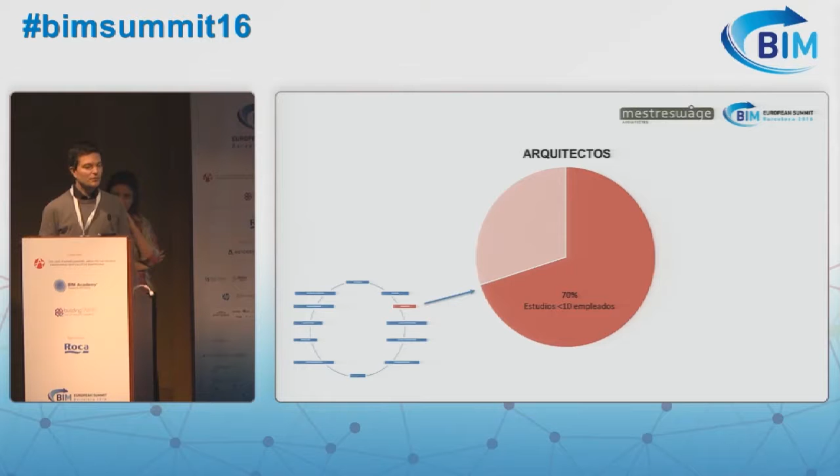Another important aspect here is that 70% of the practices in our profession have only 10 people working on them, or even fewer. So we represent a large part of our sector.

In our practice, we work architecture and urban planning as common disciplines, and we offer different services that go from conceptual design to works management. We have implemented BIM from the first stage up to the last one.

Our values, you can see them here on screen. I think the last one is the most important one. Within this context, we believe in an open architecture that is inclusive, geared towards the user, that can be adapted, and we do the projects thinking of the building life cycle.

When we say open and inclusive, it means something elastic, but we also think we need tools that can offer transparency in some way. We are small, but with an international focus. We collaborate a lot with different architecture studios in Norway, and the same happens in Finland.

BIM in Norway is very different from BIM in Spain. We are more similar to BIM in Finland, for example. So in the first phase, when we want to obtain projects, we do a project. And I will talk about the advantages. Of course, there are some disadvantages as well, but I will talk about the advantages of using BIM.

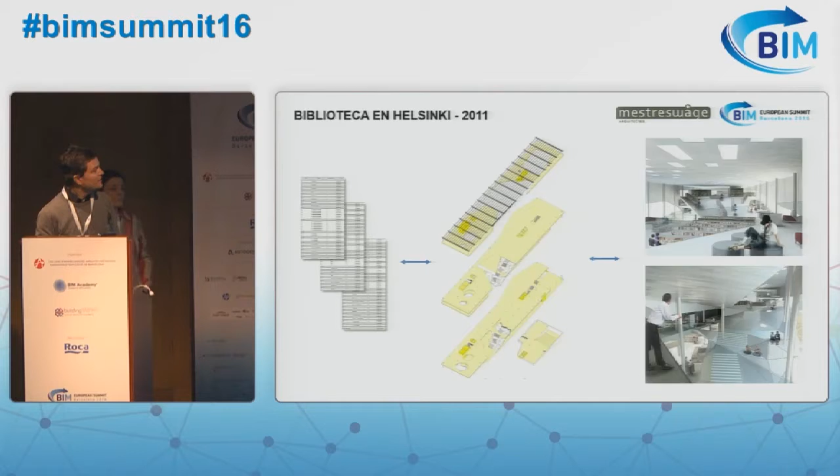We have another example here. That's a proposal for a library in Helsinki. We have a proposal for another project here. We have also post-production for images later on, of course. But basically, these are different proposals we've made.

Maria will talk now about two projects that we are working on right now. Actually, the first one is finished, for the Rådhus, which is from a competition we won in 2010. And then the second one is an extension of a hospital.

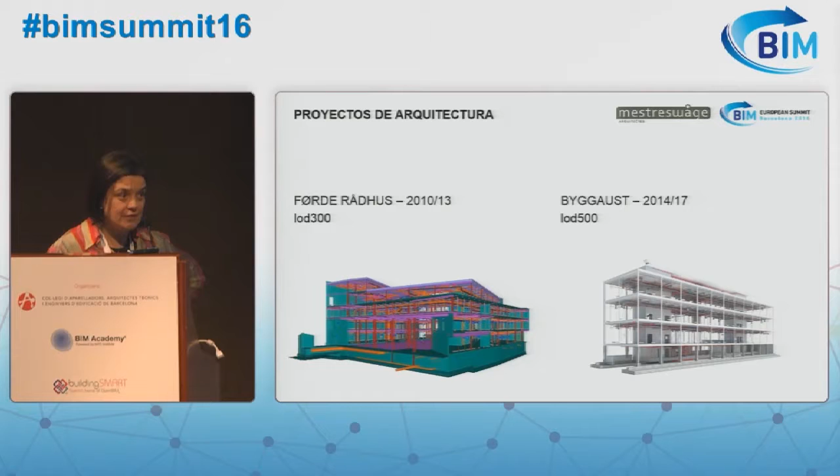For the first project, basically, we worked for local administration, and they had never heard about BIM. So the team of architects suggested to use BIM for coordination. The second case on the right is very different. It's a hospital that belongs to a wider national organization, and that was a demand from the client. We had to use BIM. In the first case, we stayed in the volumetric coordination and management, and in the right one, we are going to try to achieve LOD 500.

In the first case, we were only involved in -- so basically only the technical profiles were involved in the BIM project. Now, on the right, we have also the property, and we expect that the construction company that won the competition will also use BIM.

As Magnus said, in Norway, there's another structure, and each discipline has its own contract with the client. So it's good that each discipline has their model, because, you know, the legal responsibilities are well defined.

And basically, we work with three main coordinated models, and we see that each planner worked with the central model. That allowed us to have delocalized groups, for example, some in Barcelona, some in Norway, in a very remote place in Norway. That allowed us to work together. And that was good, because we could control everything on a daily basis without having to be physically at the same place.

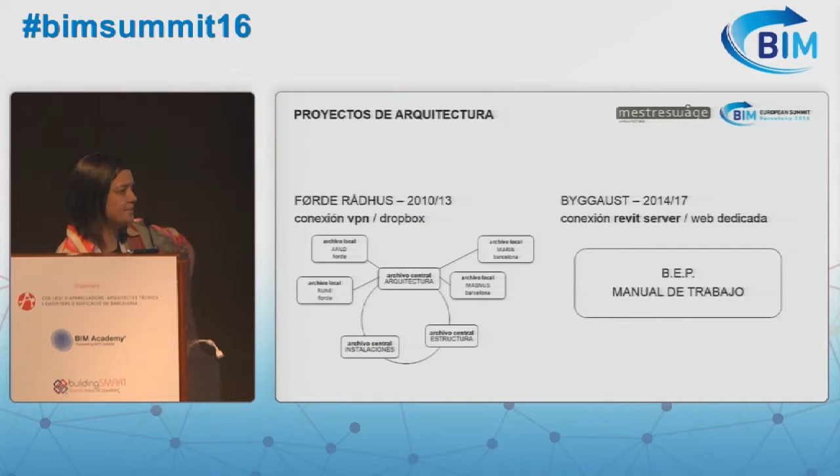With the BEP, we see that it's important to define why we want to use BIM and what requirements we have, what BIM strategy we are going to follow, if there are public requirements like in England, and we need also to define what standards we are going to use.

We use the standard from the contractor sector in Norway. Also, there are definitions. We assign roles, and we assign also the requirements.

We have very evident things here. For example, the origin of the project, what levels. We also deal with naming of the objects, alphanumeric. We don't use the OmniClass classification, we use a Norwegian classification, and this is one of the pillars to work properly all together.

We also need good communication, and that means that every project has a transparent web for all the members of the team. The calendar is clear, everyone has access to that. All the decisions regarding design are also available for everyone. So every agent participating in design can read these things. All the work in progress documents are also available.

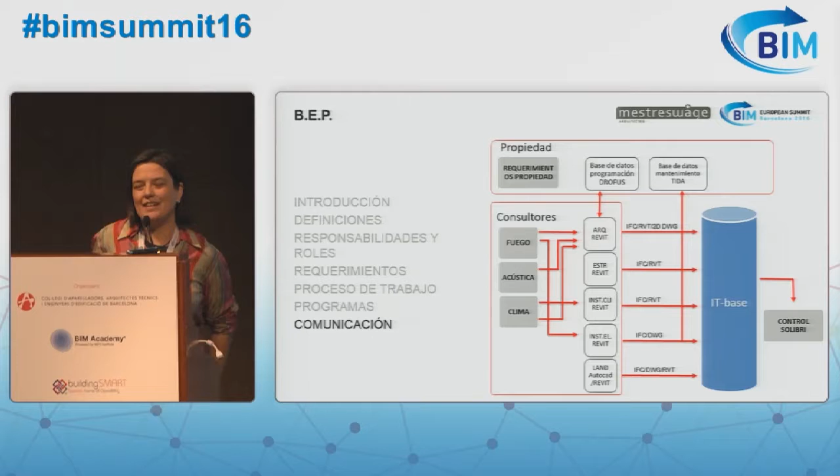The file structure is also important, because we live in an imperfect world, and the perfect BIM does not exist either. We have a lot of information coming from reports or from CAD, and the input and output need to have a structure that allows every kind of information to be part of it.

In white you can see the files, and we got as many IFCs as native formats, and we got to 2D CADs, because, for example, one of the members could not use another thing.

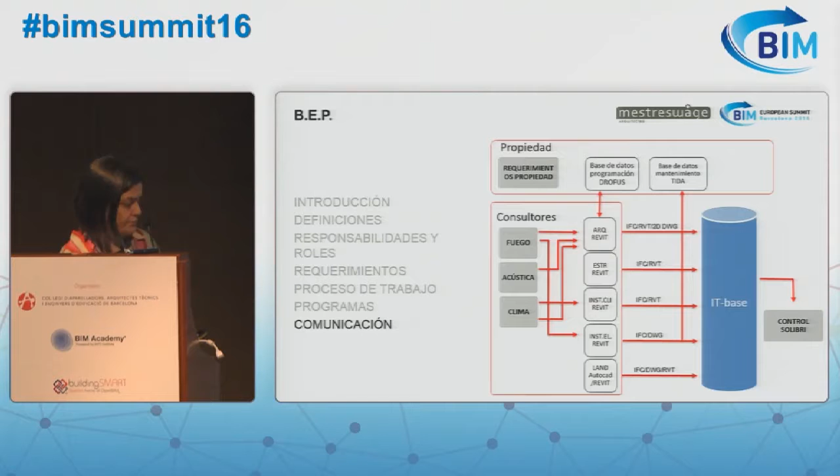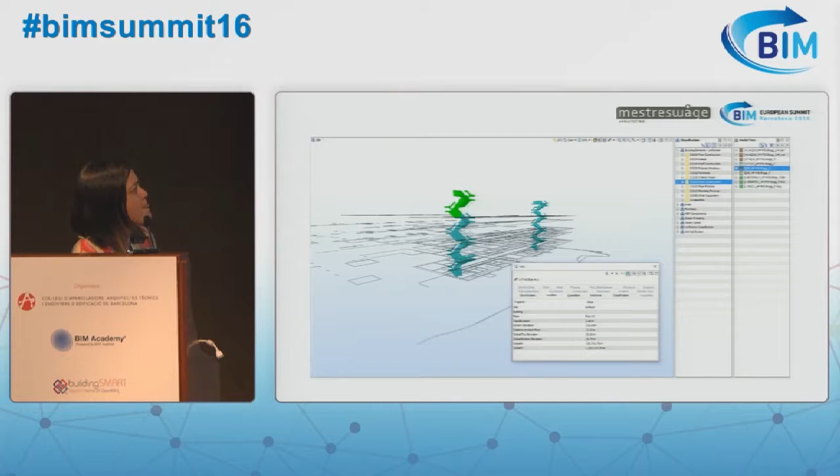Here we have a view from Solibri, the program that we use in our working meetings. You can see the facilities here, also some construction elements. And here we have some confrontation between architecture and facilities.

This is another program we use. This is a program used by people who do not really know about CAD. It's dRofus.

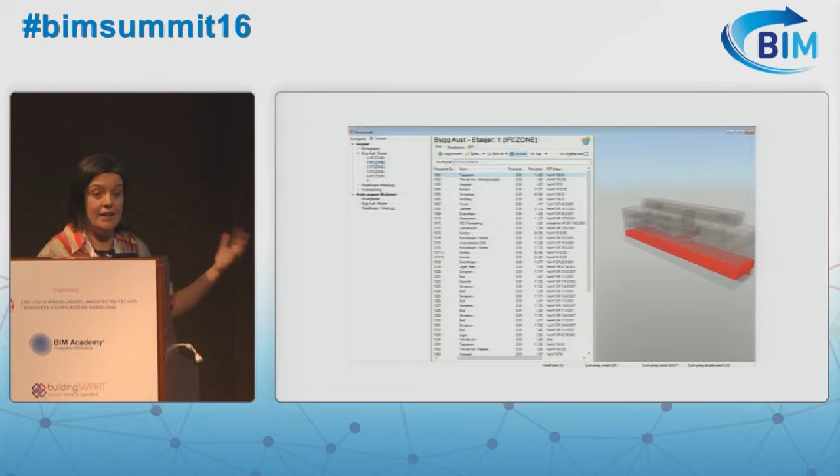For example, in the hospital we have standard rooms. They are the same throughout all the country, so we can reuse the information from previous projects and use it in our building. We can do some modifications, and we can create different rooms if we want to. This is important because people that do not know about modeling can do it.

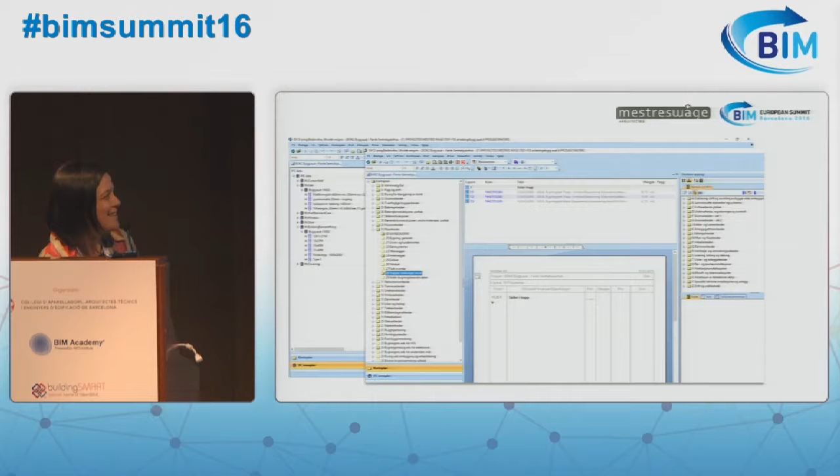We have also used this to do some measurements, but we've had some problems, unluckily.

Skanska won the competition. They are the ones that are going to build the hospital, and we hope they will do what they said they would do.

They will, because it's way better, yeah. We are saving paper here, right? They won't be working with obsolete documents if they use the IFC.

And we know that the people working on the works will have the model, and they can work in 3D to understand better what they are doing.

So, just as a thought here, we're always thinking what we are obtaining by using BIM. And I think that up until now, we've seen that we spent pretty much the same time in our office working on the project.

But what we've been able to do is take some time that we devoted to production, to idea production. So we can do more research, we can come up with better ideas, and please don't reveal these because otherwise our salaries will go down.

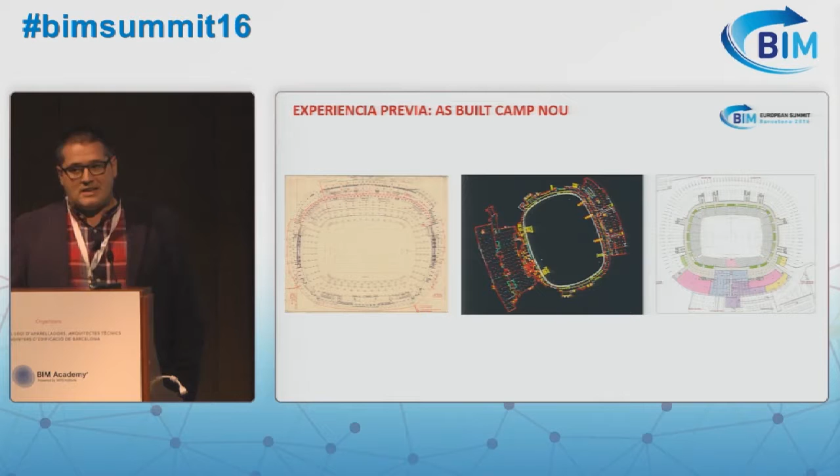So we weren't able to match the data that we had, and we really had to see the geometry, which we didn't have. Therefore, we decided to make a topographic study in 3D of the whole stadium with more than 5,000 scanner points, and with that we developed the model you can see on the screen.

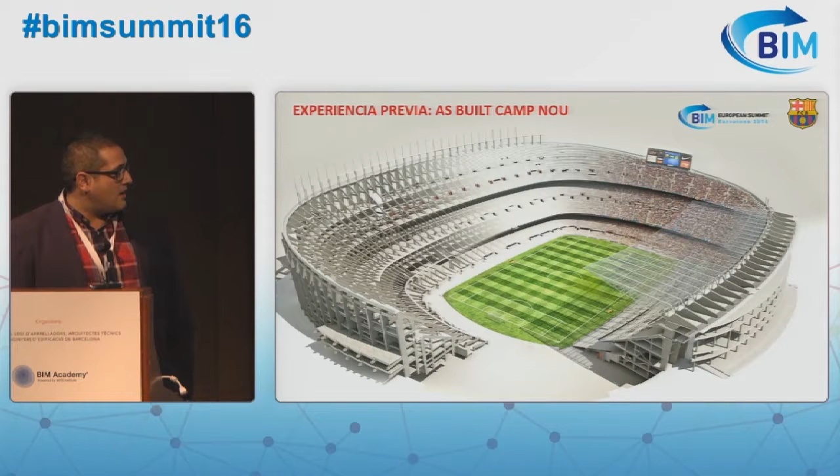Besides that, we also incorporated a range of parameters. Here you can see some pictures of the model, and then we've got a video which we created about eight months ago.

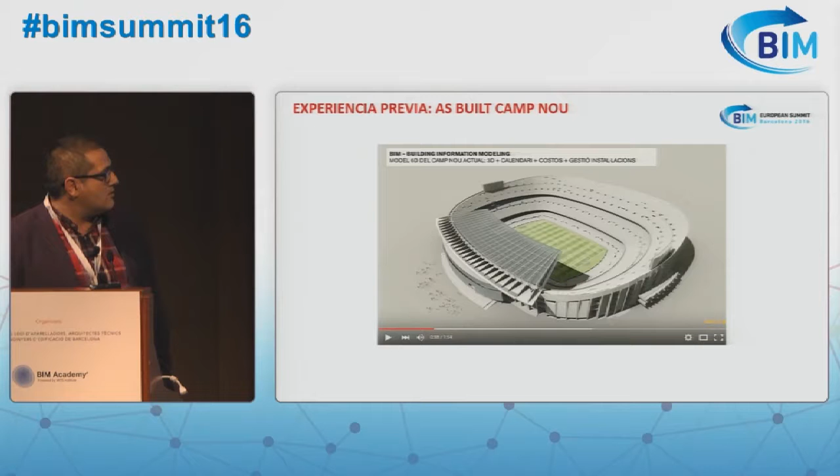Here it is explained the process, the developing process of this model and how this information is integrated.

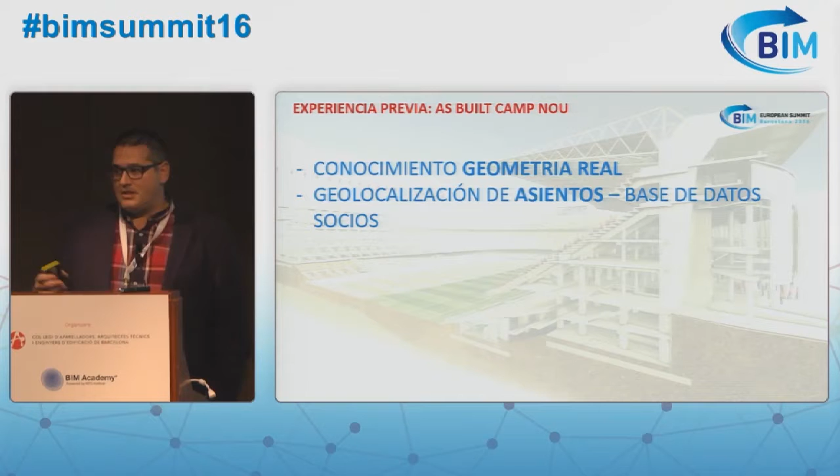We had to gather knowledge on the real geometry. On the other hand, we developed a side project where we designed all the seats of the stadium. We did geolocalizations of them, and we matched it against the database of members of the club, so you can see how powerful this is on a social level.

We incorporated all the structural data—we had a consultant for that. We also incorporated all the visible facilities, and we are incorporating both the visible and underground facilities in the whole stadium, in order to avoid some of the problems that I'm going to explain right away.

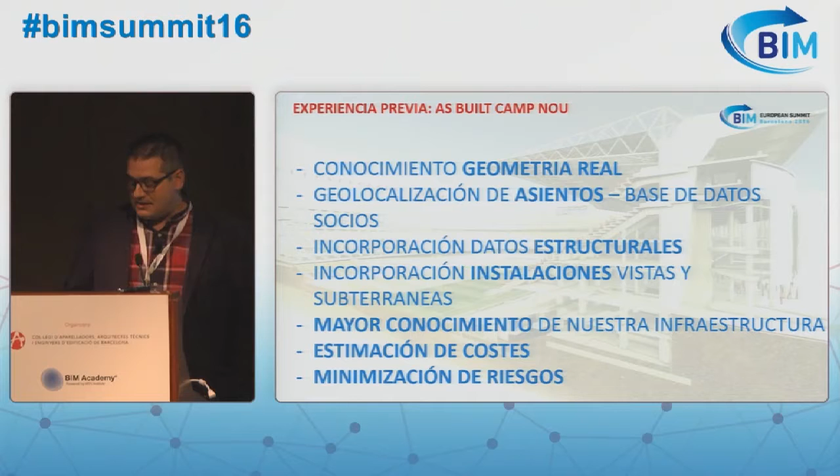This allows us to have a deeper knowledge of our own infrastructure, and it's easier to minimize the risk. On the other hand, this model has allowed us to estimate the costs in a much more precise way.

The second point we saw very clearly within the team at Espai Barça was that this whole BIM thing is kind of difficult to grasp if you don't have any idea about it. It's difficult to understand if it's a technology, how to implement it into a project. We realized it was a huge opportunity for the football club.

In terms of commercial exploitation, from then on we decided, as something mandatory, that any stakeholder participating in the process should have minimum knowledge on BIM. They should be able to demonstrate some minimum skills in BIM technology, but it's pretty obvious that any company, any constructor that wants to work with us, must be at ease with BIM.

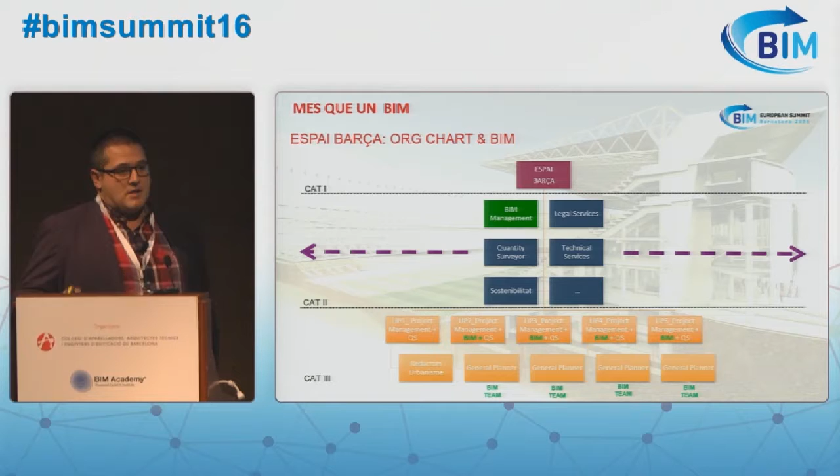In this slide, I would like to present a summary of our organization. As you can see, in all project units, both the architecture and engineering groups, we are demanding BIM knowledge. Also, for the project managers, we are demanding to integrate BIM management. And also at a consultant level, towards the client, we have a BIM management team in order to make this traceability possible.

There's a quite clear phase within the project, which is the design and construction phase, and then there's a second stage, which has been developed in the past six months, which is management and exploitation of assets.

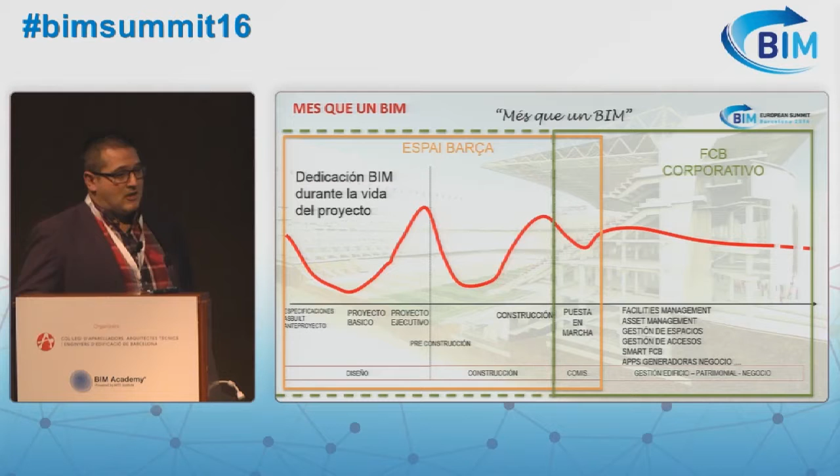This is now under the management of the club, the football club. So we are facing a project which does not only include building, but also has corporate components, and therefore the motto: more than BIM.

So this philosophy can be summarized as BIM becoming a methodology for the football club. We also approach the database in a global way, but at the same time we focus on the goals that we want to reach with the BIM methodology.

For the football club, both in the construction and the exploitation stage, it's an as-built, a continuous as-built, and this will allow us to manage the whole facility in a more coordinated and controlled way, which is not possible right now. All this has some internal implications.

In our strategic plan, there's this term, BIM culture. When we talk about BIM culture, there's a direct implication to different departments within the club. Some of them really need to work on that, and some others will have to integrate at a cross-sectional level.

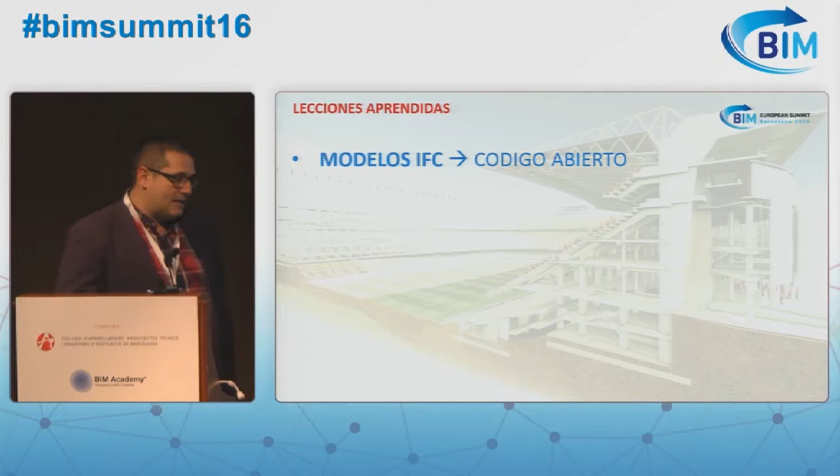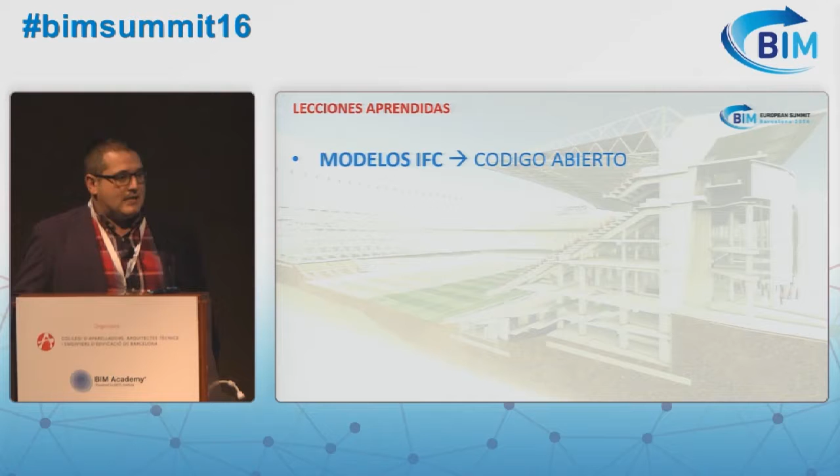At that time we decided we went for the open format, and I think we made the right choice. Nowadays, I think it was the right thing to do because it allows us to scale the project.

Secondly, it seems very easy, and I'm quite glad to be here today and see that so many people are developing projects like that in other countries. But when you are facing BIM implementation for the first time and you try to grasp it, which is something quite complex, and you try to define all the tenders, all the processes, the BIM execution plan, the taxonomy, fundamentals in taxonomy, the parameters that should be used in the models, the degree of detail that you are going to use, it's not easy.

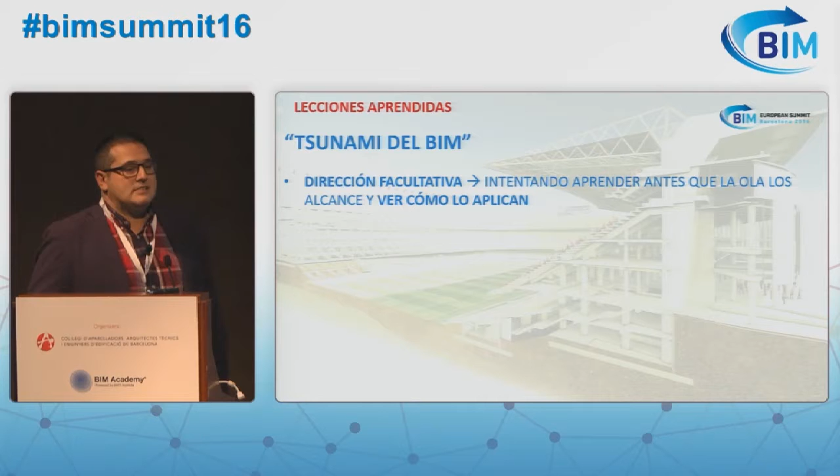Project managers should try to learn before the wave reaches them. So I have this feeling that they are really striving to see how they are going to apply it, how they are going to implement it.

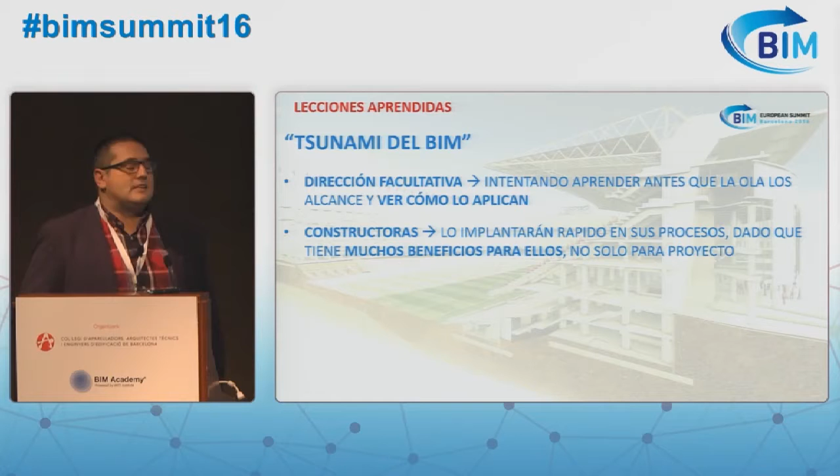Construction companies, from my experience having met many of them, and some of the most important of them, many are already implementing BIM, even if the clients are not requesting it, because they really see the advantages, not only for the project, but for their own project management.

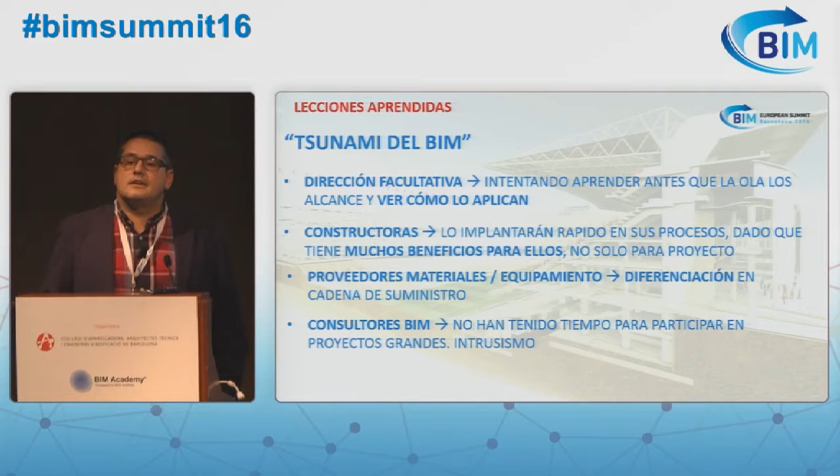Also, materials and equipment suppliers, I think they should be differentiated in the supply chain. And finally, all the consultants, BIM consultants, my feeling is that not everyone has had the chance to participate in large projects. It's not the same developing housing units as a football stadium. So it's a continuous learning process. Also, in my opinion, we have seen some intrusism, people from other fields taking advantage of the situation and providing services which are not their expertise.

Finally, four key concepts which we believe are key for success. I always highlight common sense. I really defend BIM, I believe it's great, but we should have common sense. Until a few days ago, we were working without BIM, and sometimes we try to develop everything based on BIM, and this makes it more difficult to have a clear traceability.

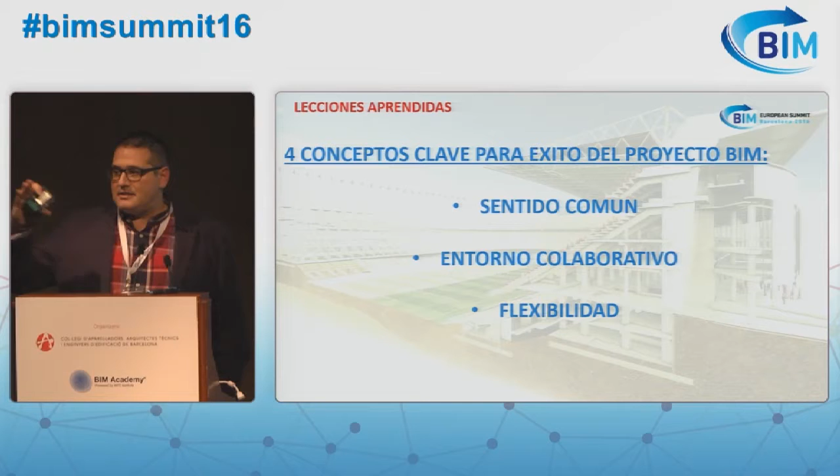Very important: a collaborative environment when developing a BIM project. This doesn't only mean having the best BIM consultant at your side, but this person must be willing to collaborate with the customer, with the engineers, and everyone. Flexibility to make decisions, to focus clearly on the different goals without getting lost, without being too ambitious, as somebody was saying before.

And finally, that all stakeholders see it today as a great chance to improve their professional careers. I believe that's a huge improvement for the industry. Thank you very much.

Tornadoes of BIM, we've had tsunamis of BIM. Now, I'm all for disruption, but they seem a bit destructive for me. I think I prefer a force that tends to do well for honest and hard-working people, and perhaps the opposite for dishonest and lazy people. So I'll offer up magicians of BIM.

Anyway, we go from someone who I would guess has had one of the shortest journeys to get here today to someone who's had one of the longest, not the longest, but our third and final speaker is Felipe Quiroz, who is the founder and current technical director of ID and BIM from Peru. Felipe.

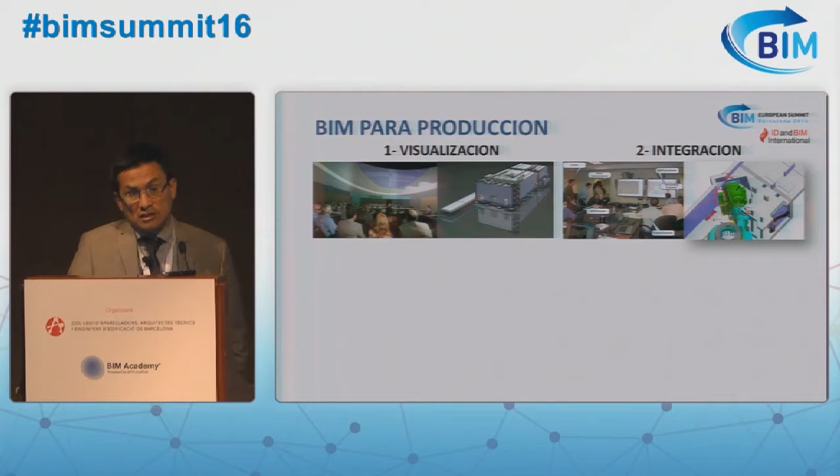But I will talk about the experience in Latin America, Chile, Argentina, Peru, and also past experiences in Europe, to bring BIM to another level, not only in visualization, integration, and harmonization. In Peru right now, we basically use it for harmonization, but we want to bring it to the next level, to the production level. And that requires technology in order to model something, and we can do all the draftings, all the planning, and everything, and we can create automatic machines. But before, I need to explain some things.

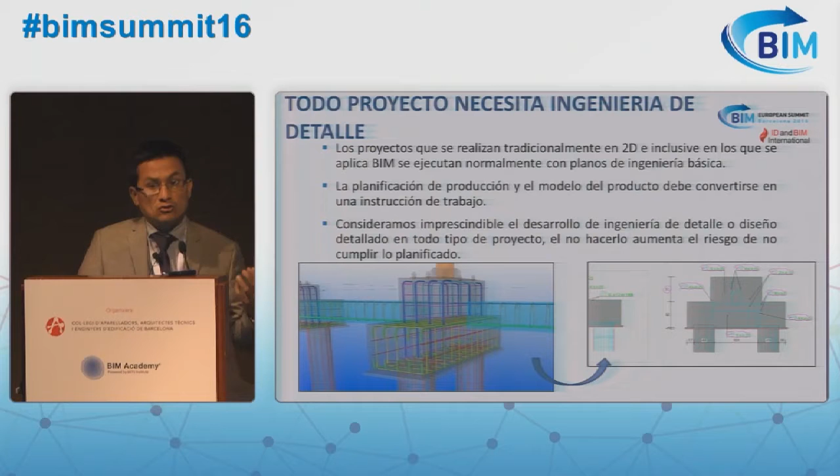In Peru, really, we don't have the obligation to do detail engineering. I think it's the same in Spain. We build using a basic engineering drawing. That will have to change if we want to bring BIM to the scenario. We want to create every project with a graphic representation obtained from a model, and that's detail engineering.

When we talk about virtual design construction, we see that in Peru we use VDC to generate BIM models. But not only that, we want to move the project to the early stages so that we can have a positive impact on costs and we can do some economic assessments.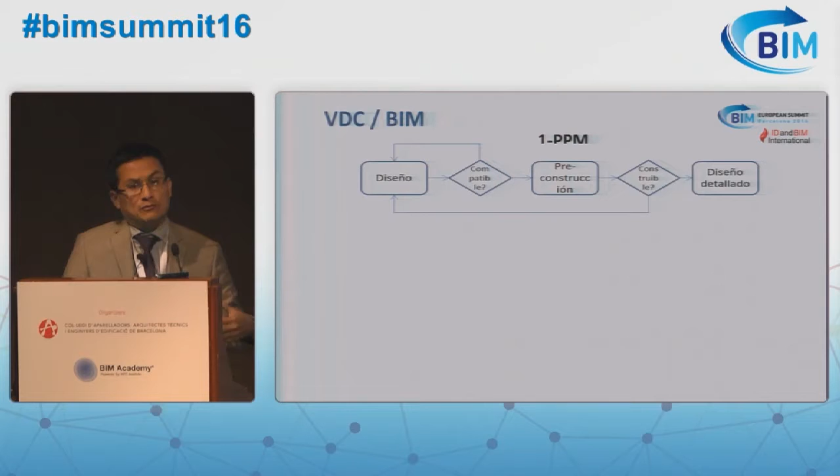How do we do this? Well, our company helps a designer, a construction company, an engineering company. We look at what processes they follow, a process that they know, and then we tell them how they can include BIM models. And these models can be useful so that when we have ICE sessions, these models can be helpful to visualize, obtain all the metrics and indicators that will allow us to optimize the project.

These may look like common sense, but why aren't we actually implementing it? Well, basically there's the time constraint, and basically most projects are done in 2D. So when we do the modeling in design and we want to bring it to construction, there's almost no time to bring that model into something that will actually be built. If we want to do that, we need to have the right tools, the right technology, so that we can increase productivity.

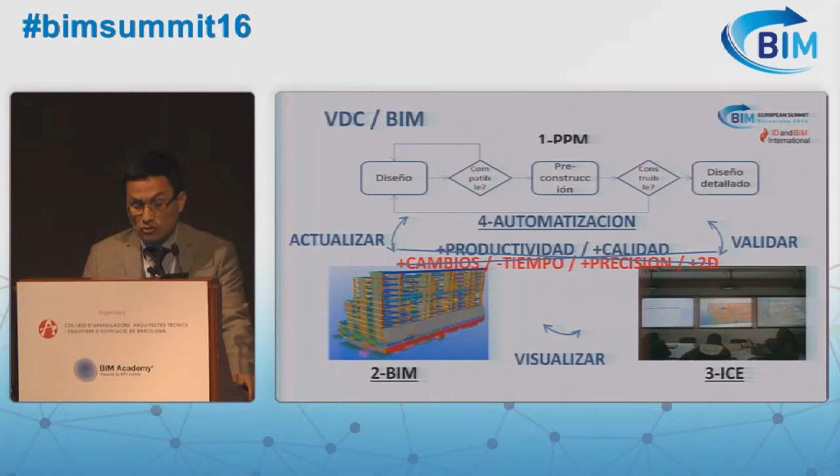And we also need to have automation tools, but basically we need to understand the flow, the process that we're going to follow, and what indicators will be the ones that will tell us what to do. So when we create the drawing, we need to have these indicators that will basically tell us how we are doing with our task.

So what we are proposing is a model where the builder will see the prototype before it goes into a real detail engineering drawing. That's the most important. We want to work as much as possible in the model so that we can turn that into a drawing or into a specification for building. Here I will show some examples of how we have done this in Chile, Argentina, and Peru, and now also in France. The first thing we see here is how BIM is used in the design stage.

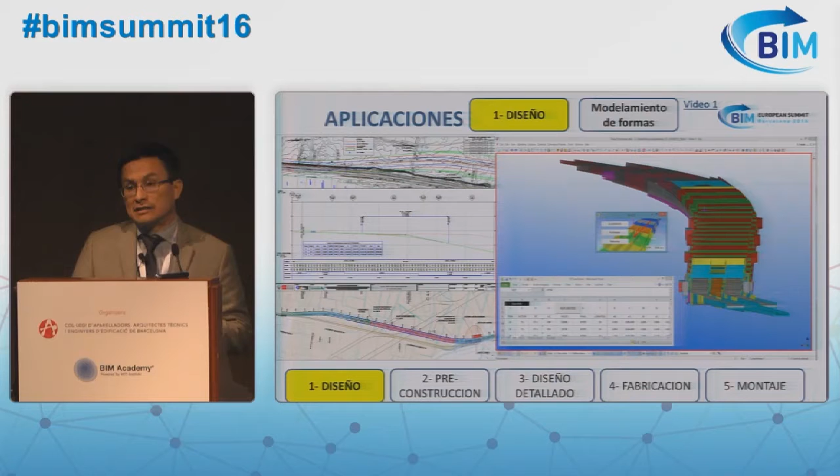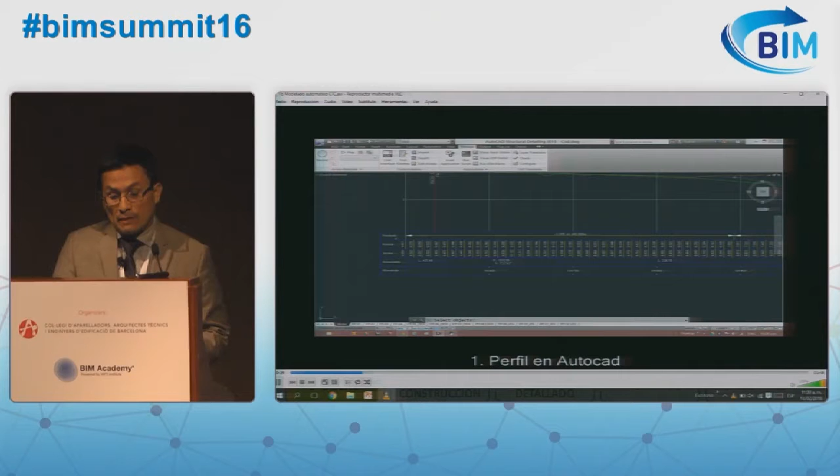The problem we had here is that we had a tunnel. It was done in 2D drawings, but several aspects changed, like the gradient. So the client used, for example, AutoCAD for basic engineering, and then we couldn't really change it. They were going to do the AutoCAD drawings. But the data we obtained from the drawings, we had to convert it to a model, and we used Tekla for that.

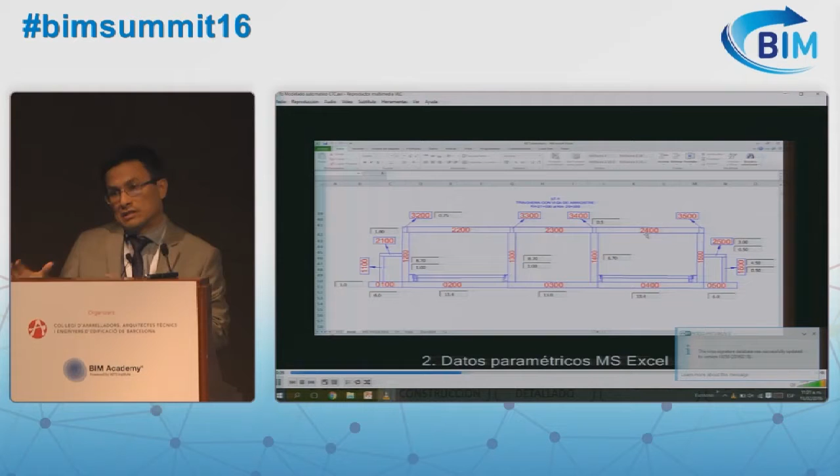The client used some Excel sheets to include all the typical sections of the tunnel, and every time that the AutoCAD drawing changed, we also implemented the changes automatically in the Excel sheet. And afterwards, the Tekla tool read these drawings to generate the model for the tunnel.

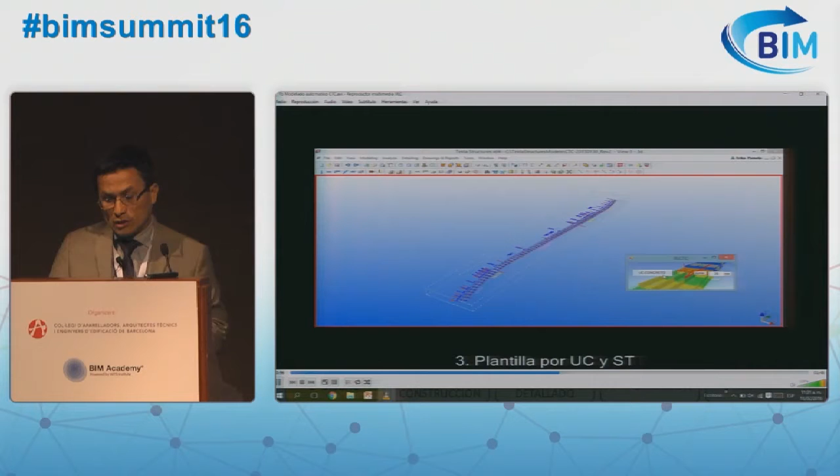Here you can see how the elements are placed into the drawing. And why did we do that? Well, because the changes would happen many times, so every time that there were changes, we didn't do the model all over again. And therefore, the client won't want to use 2D. They will want to use BIM because it's way faster. That's basically the idea behind it. BIM is faster.

We also used IFC so that we could combine specialties. For example, here we had models done with Revit, and we joined them with Navisworks, and we worked in a collaborative way.

Also, regarding design, what we do is, before we place the reinforcements, we verify that all the concrete is compatible, and then we define whether there should be some openings and so on.

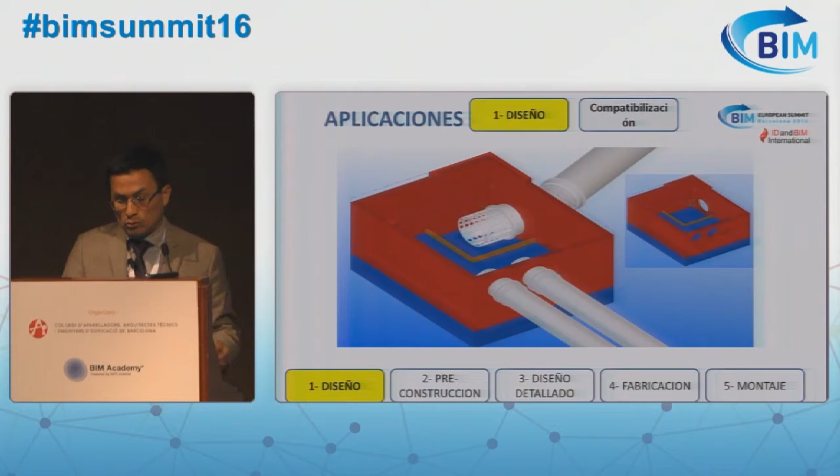So we use this tool to import reference models with Revit, and then we work our structure in Tekla. We can also use drawings as a reference model. We also work with the reinforcements, and based on our experience this allows us to do any structural component in any way.

When we only have the model with the reinforcements, we can have images and reports like the one on the right, and we can modify the design to obtain standard measures. Therefore, we can reduce the amount of steel in the different varieties that we need to use. So we see some benefit already.

Nowadays, this service has an additional cost, but if we use it rightly, it's worth it.

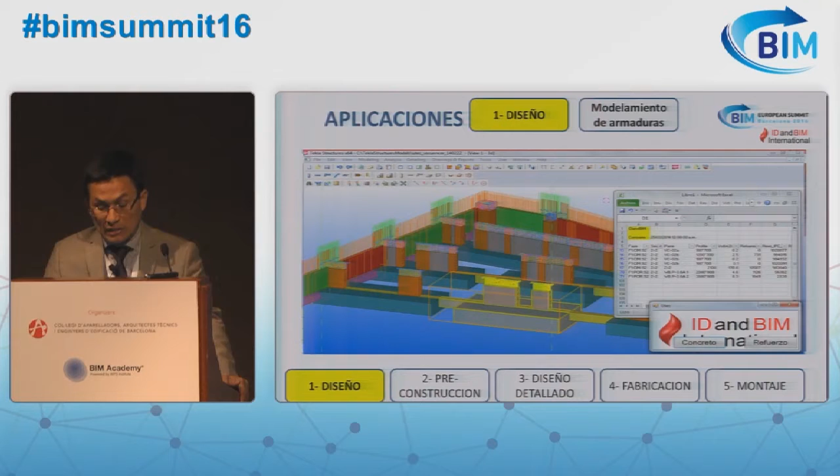Also, it's very important to have a structured catalog, which means naming all the elements we will build, and also setting a due date for fabrication, manufacturing, and delivery. Everything needs to be named. Then we can decide who will be in charge of that drawing, and when.

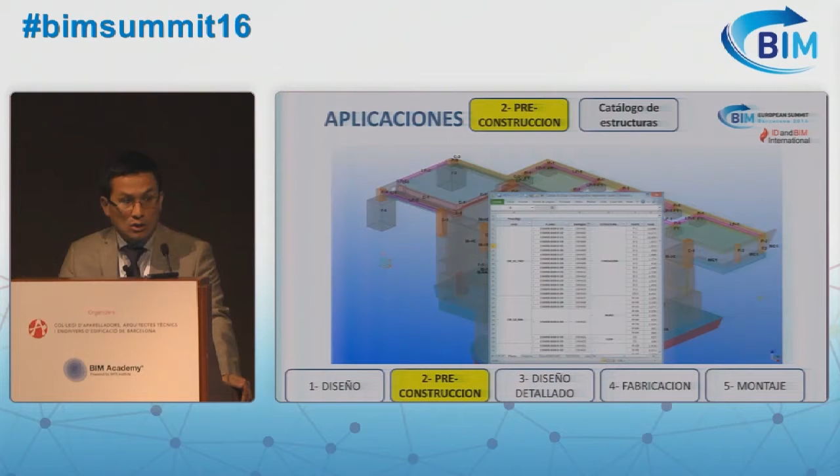It can be a simple building or a complex work, like an energy plant. The main thing is not BIM itself. We need to define the flow, the name of the elements, and that they have a constructive sequence.

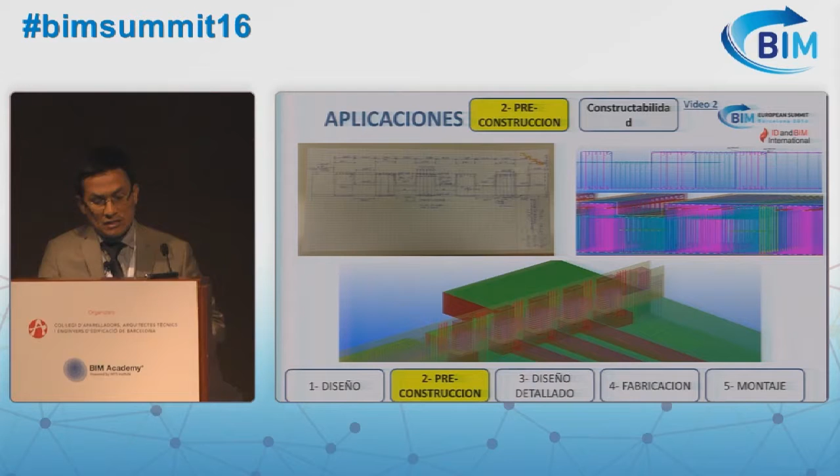Thanks to BIM, we can verify the constructability of the elements, either from a sketch or input from the builder, to see if we need to change the basic model to something more complex. We need to do all these things only in the model.

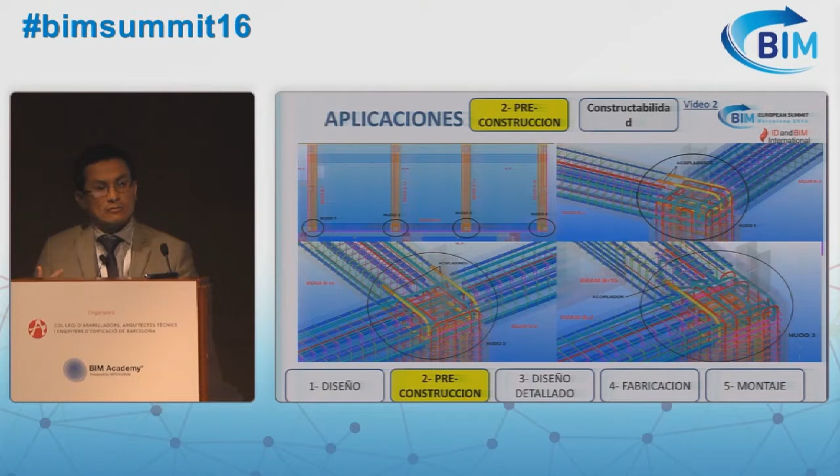And after doing these collaborative meetings, we get the drawings. We'll see another brief video showing, in a simple example here, how we use Tekla for this recreation.

And we will show here how this element, we see some interferences between the profile and steel, but also we will see how this piece is built.

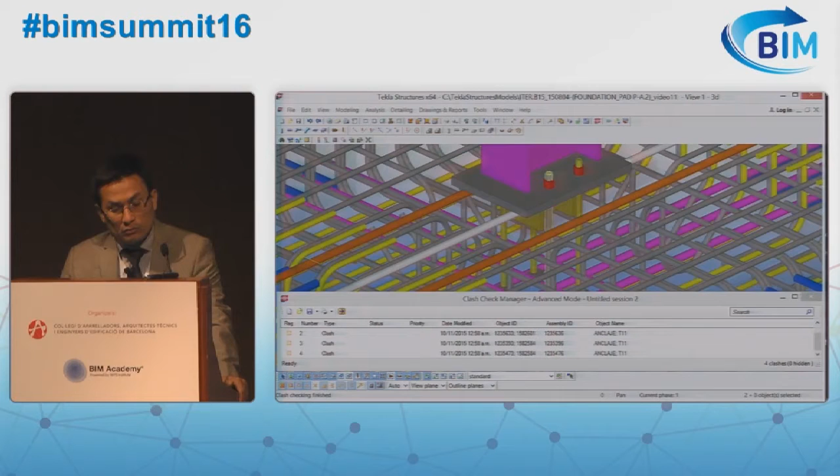This project, for example, is done in France, where no bars could really collide. So thanks to this representation, we see that there is some collision, for example in the beam reinforcement, colliding with the profile. So the designer basically said we can move one bar to the side, and it was approved.

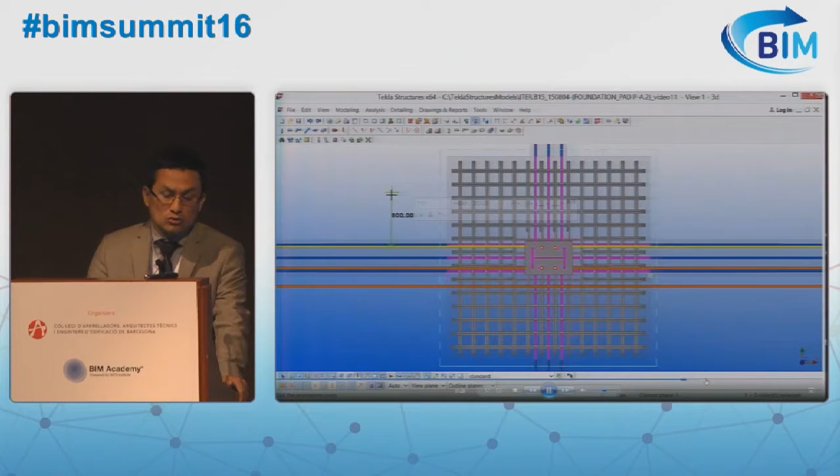So this saves a lot of time that is wasted on the works, because, for example, if that happens in real life, we need to stop the project and do some queries. But if we work with this technology, we save this time. So basically, we created a beam with steel.

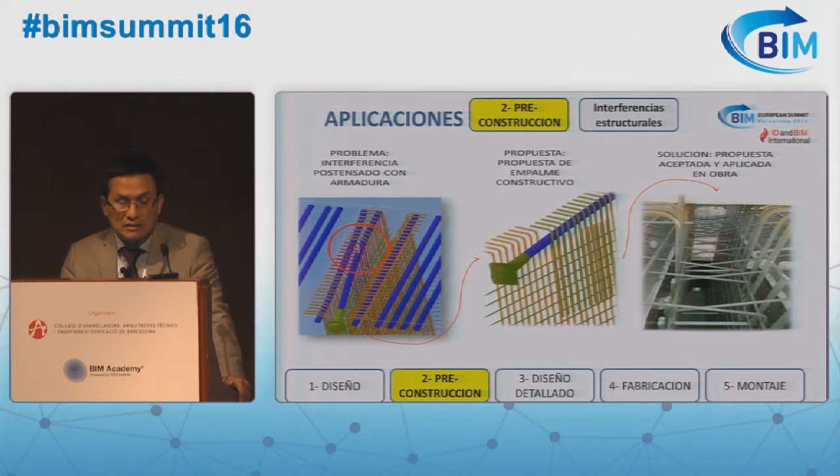Well, moving forward, we are still in the pre-construction phase. We also detect other aspects.

We do some templates so that it's faster to build some elements on the work site. We want to avoid interferences, and the software is ready to detect all these things so that whoever knows how to do this can give the answer. In this case it would be the builder.

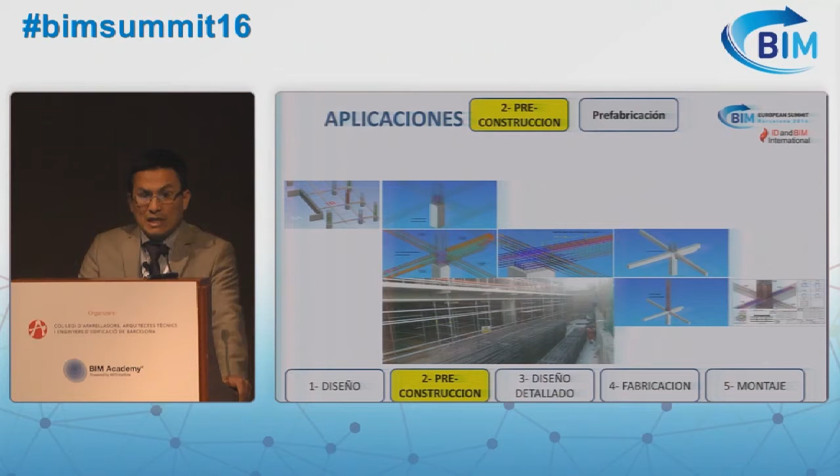We also need to define what elements are going to be prefabricated, because in the original design we don't have it. If at the beginning we do a project with BIM, Tekla, Revit, when we bring it to real building, it will change, because it has to change in order to build it. And the builder will bring his input to the table. We need to be flexible in order to change all these things, if the changes come from a person who knows what they are talking about.

Then we have 4D simulations. It's just a presentation of the elements we are working on. It's basically to show what we are doing.

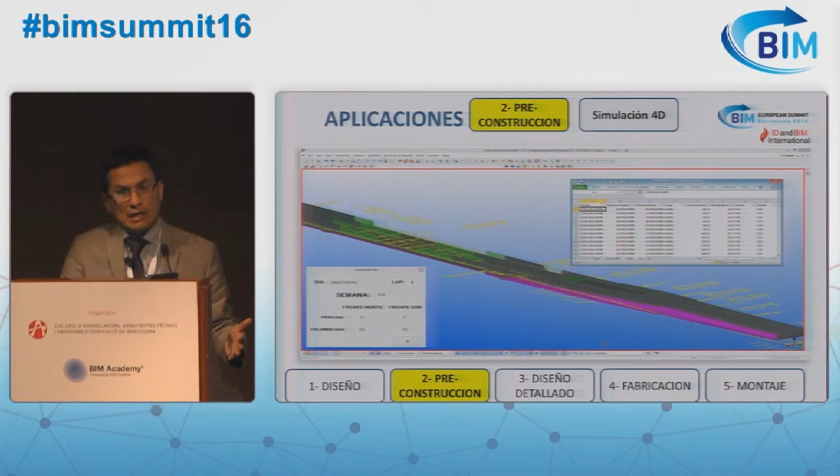But if we want to know exactly how something is going to be done, we need more than a 4D representation. We need to modify the design, but we need to make it buildable. Once we approve how we're going to do something, we stick to it and we do the drawings.

Drawings can be the same as we obtain with AutoCAD. We have many different kinds of drawings, different formats. And currently we can do that thanks to technology. Some years ago it was very hard.

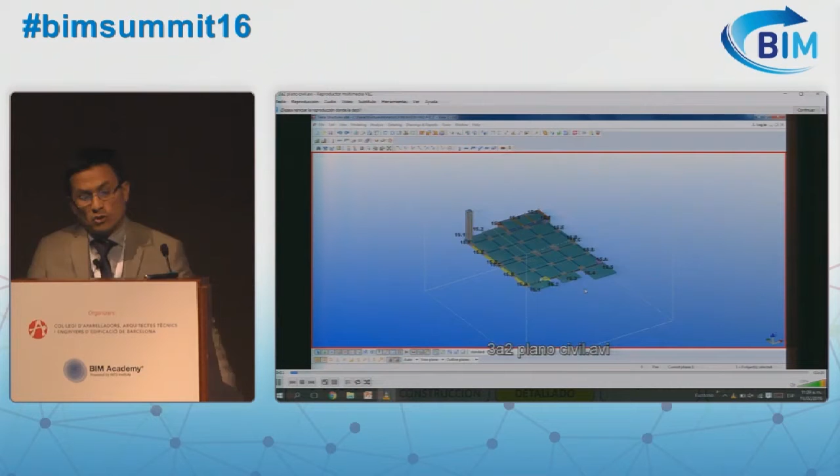Nowadays, for example, we work with Tekla that allows us to export drawings, and we can import that to AutoCAD, including all the layers and all the line vectors, so that it follows the client's and customers' standards or the project that we are working on. This is the drawing environment for Tekla. It basically saves all the settings so that it can do the drawings.

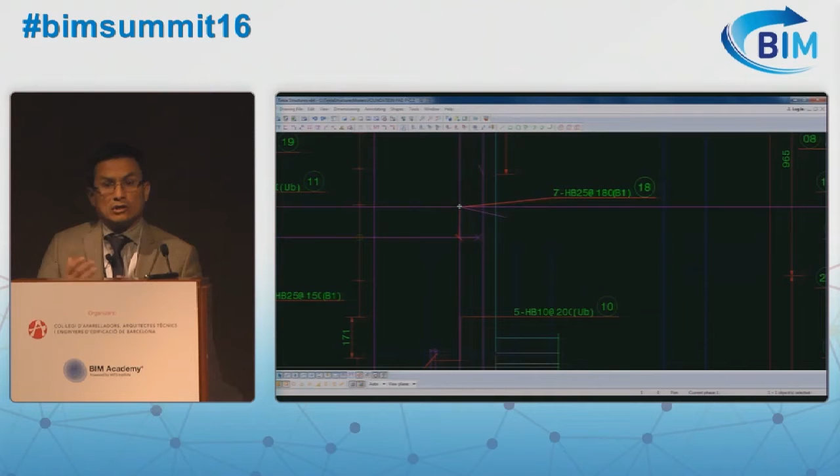Basically, Tekla shows what the model has. It can take as much time as doing it in AutoCAD, but when we have to implement a change, it implements it automatically. So basically, using BIM doesn't mean the drawing is already done. No, it will take more time, but then changes are implemented automatically.

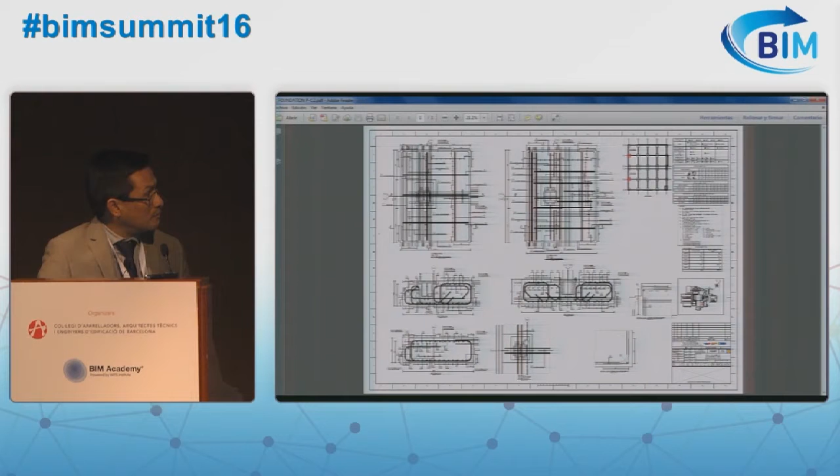But if you do models, then it can be faster. Here we can see how the drawing is exported in AutoCAD. We have all the layers, and we see how it is exported in PDF format, or any kind of drawing we want.

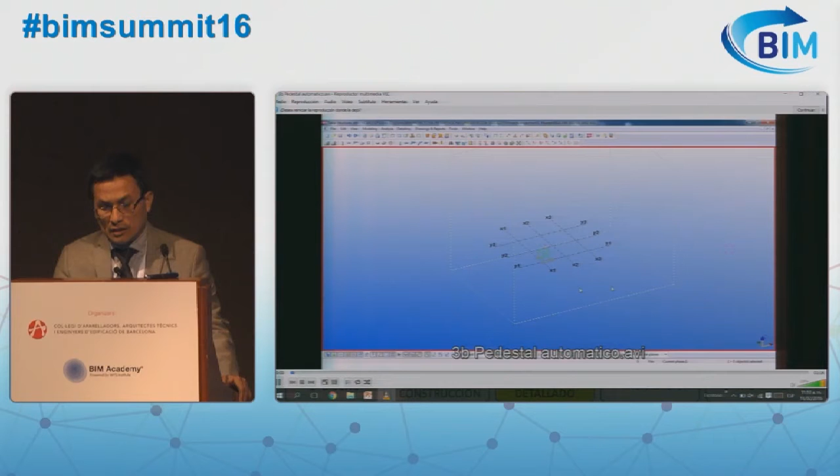When do we see a difference regarding the amount of time? Well, it applies to automation. For example, we have a project in Argentina where we had many drawings for bases, but he did some sketches. He didn't do some basic engineering drawing.

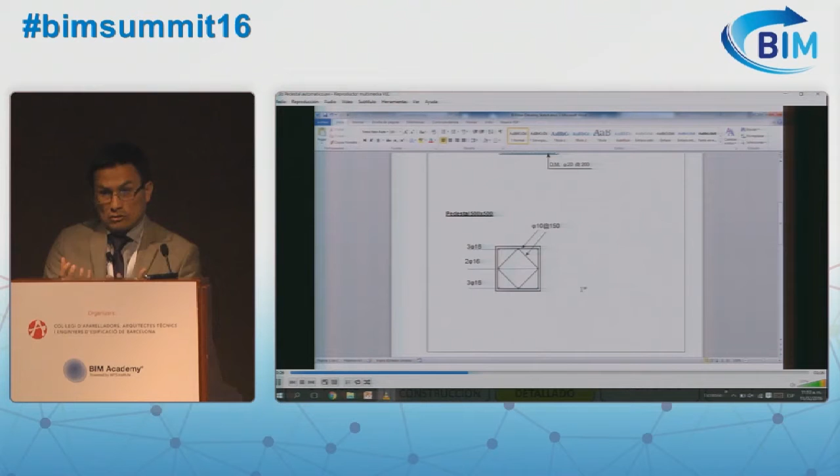So basically, the person in charge of the calculations did some sketches and used some Excel sheets where he put all the values. He gave us that information, and together we defined a form where we included the geometric and also structural information. That's what we are seeing on screen. Then the client filled in the information.

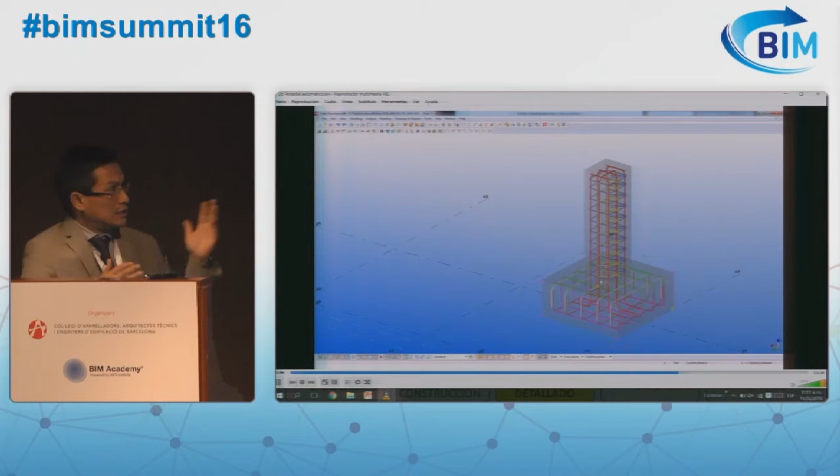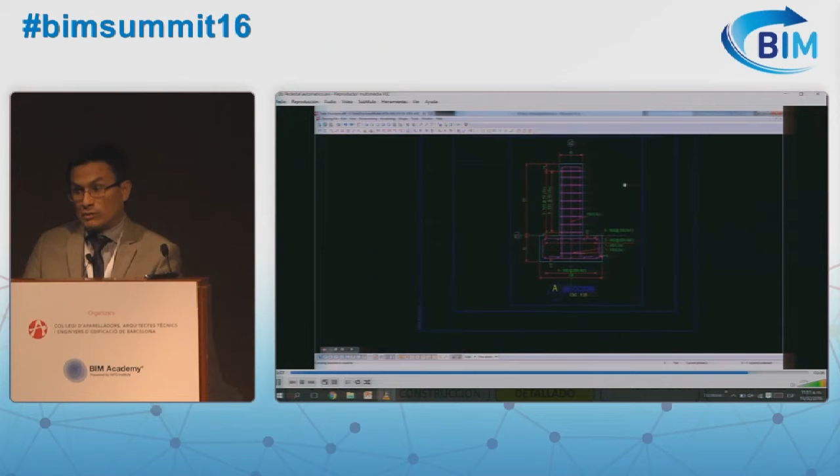He had a structure catalog and just filled in the gaps. That's when it becomes automatic, and that's the difference between the traditional method and BIM, because just by placing the information, you have the automation and the model is automatically generated, and also the drawing. So you have the model and the plan and the drawing automatically.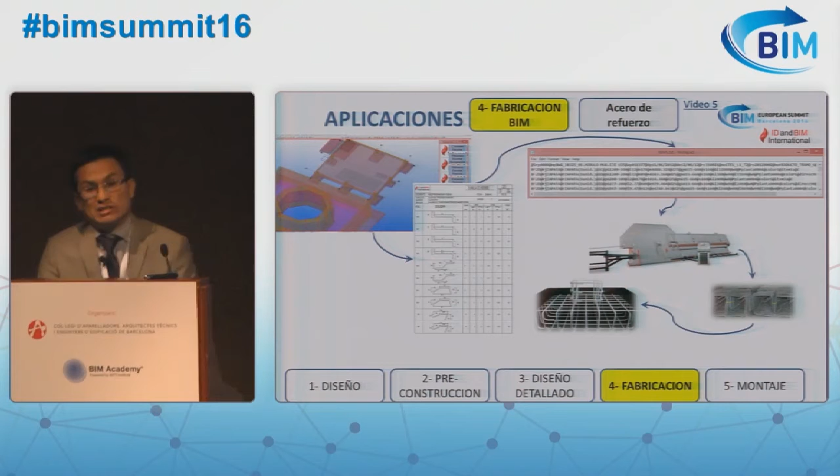So timing is very different between the traditional method and the BIM, but you need to have the right structure to do so. When we have a project, first we need to think what we can do with this automatic way, and then we do the rest with manual tools.

The BIM fabrication means, well, I'm actually skipping this. Tomorrow we are going to have a workshop with Celsa. Some years ago we saw the way Celsa worked, and we have been able to replicate what they do in Nordic countries. Basically, they do modeling, and they work with a metal company.

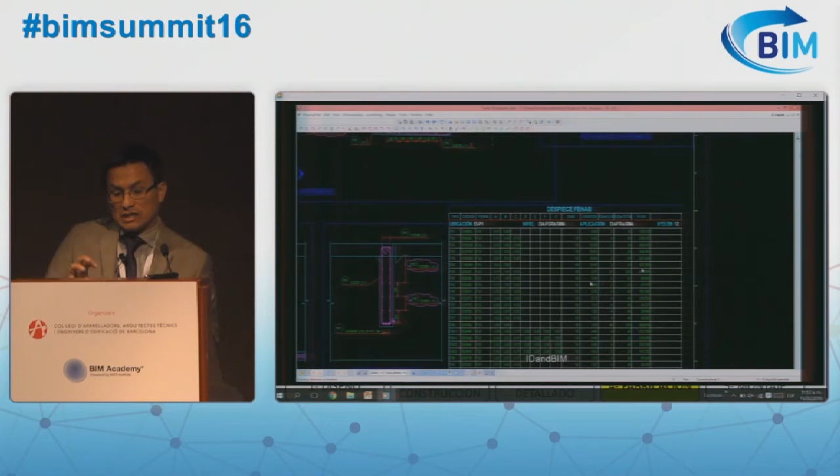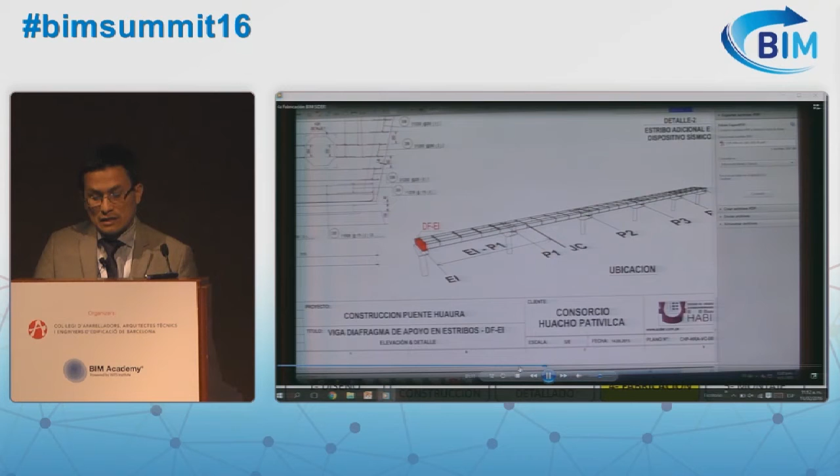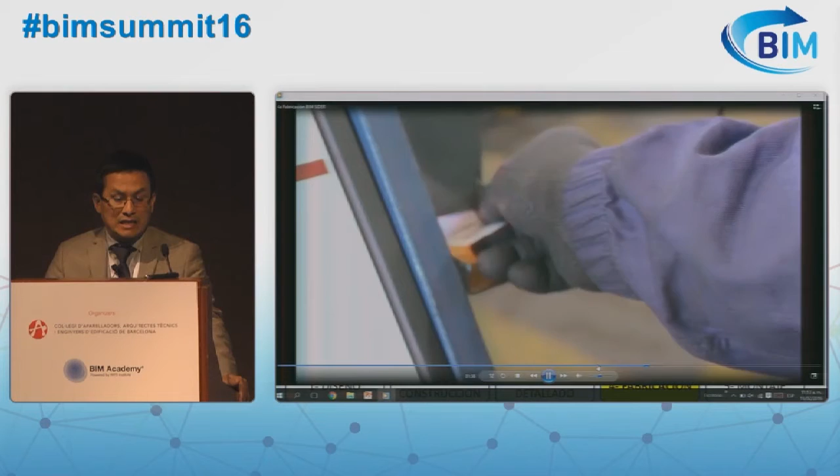And also then they used their automatic machines, and they built the steel from the model in their facilities. So since last year, we're already doing this, and we are obtaining good results, because what we are modeling has always been manually manufactured, but now if the model is good, it can be automatic. Of course, there's some verification step, but it's working.

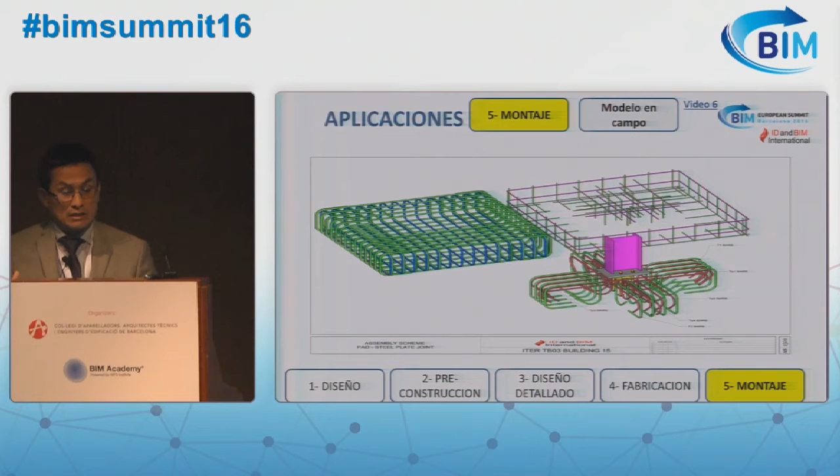And just to finish my presentation, how can this model become real? How can it help with productivity? So we use Tekla BIMsight in all our projects so that we could not only give the drawing. For example, on the left, we can imagine it's a tablet.

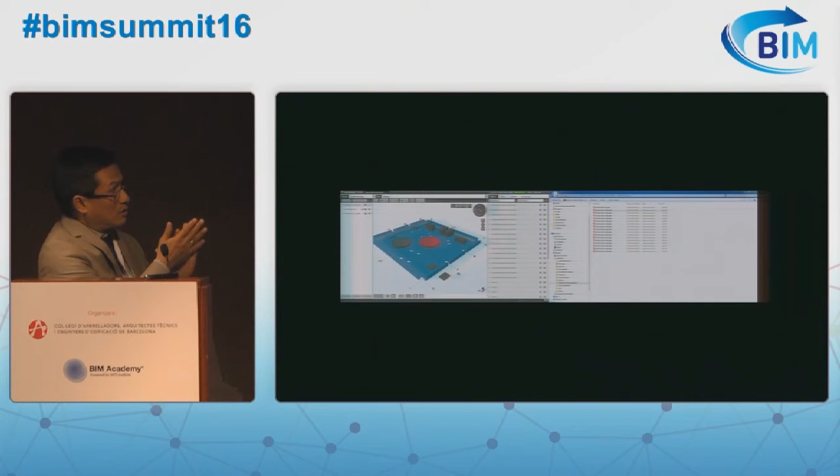And what we do basically is we link each drawing on the right, which are PDF drawings. And each of these drawings appears on the list I'm pointing at right now. And if I select a drawing, it will show the different levels, the base, the reinforcements. And each drawing comes with its model, and it has the same name. So when I want to build something, I will look at the model, and I will tell the worker what they are going to do.

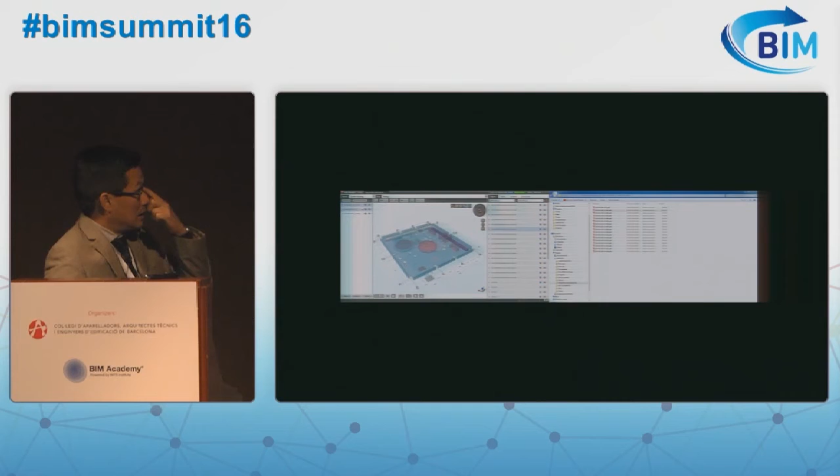We have a 2D drawing here. It contains information that sometimes is not understood, but if before the building stage we have a meeting with the workers and I show them what they are going to build, it helps them greatly and it increases productivity.

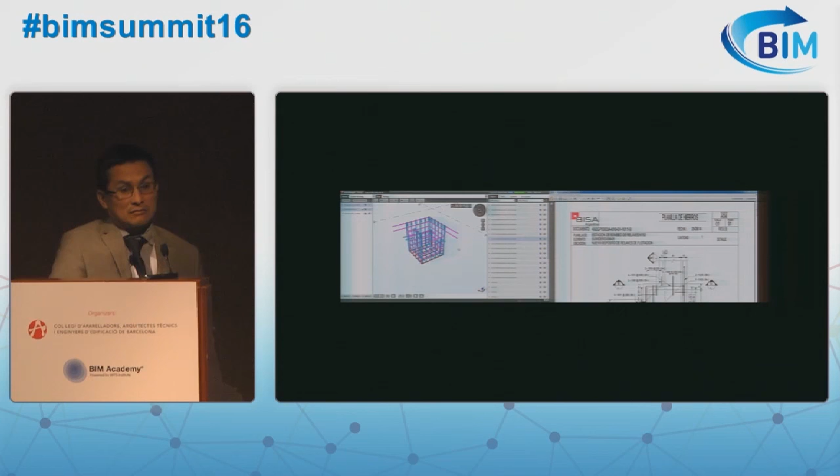For example, we have this drawing. It's a 2D drawing, and then if we filter it in the tablet I was mentioning, we have this 3D drawing, and I show it to the worker, and then the worker knows what he's going to do. If he only looked at the right, he would have no idea.

So on the left, I can mark pieces and elements in the model because there's traceability. However, in order to do so, I had to think of the catalog and how the model was going to be done. And this is basically what I wanted to show, where we are working in Latin America and also in Europe. And that's it. Thank you very much for your time.